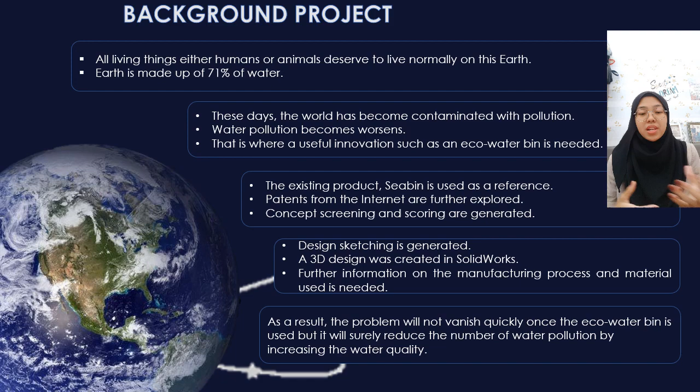We collect the trash from the sea, so we can see we can reduce the number of trash, the amount of trash or debris thrown by humans into the sea, rivers, or lakes, becomes less than before.

Background. Next, we go to the problem statement that we encountered building this innovation. First, because rubbish and debris were thrown into the water, it is so uncomfortable to see the rubbish floating on the surface of the water.

The second one is aquatic life threatened by the rubbish and debris thrown into the water. The aquatic life will be in danger because they cannot survive like we can on Earth—we cannot survive with polluted air, we cannot survive. So this is the habitat for them; they need a comfortable habitat so that they can breathe normally.

Next, the problem is also about the environment—if tourists come to our country and rubbish is mainly floating on the surface of the water, it is not an eye-pleasing environment to look at. Then, water conditions become worse, and the last problem is water pollution increasing these days.

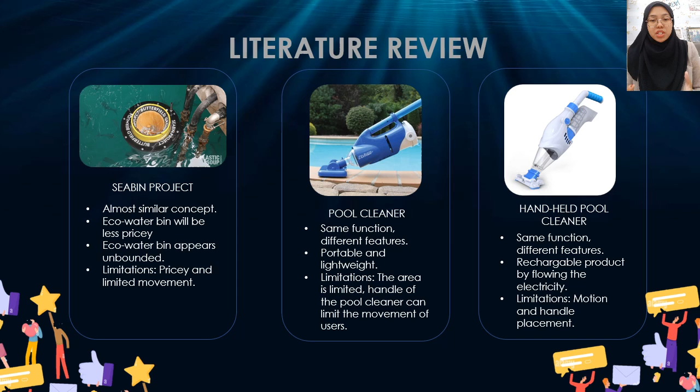So this is that limitation, but this product is rechargeable by flowing electricity into the charging port. This is one of the advantages of the product. All three products have the same function, which is to remove trash from the water, but have different features.

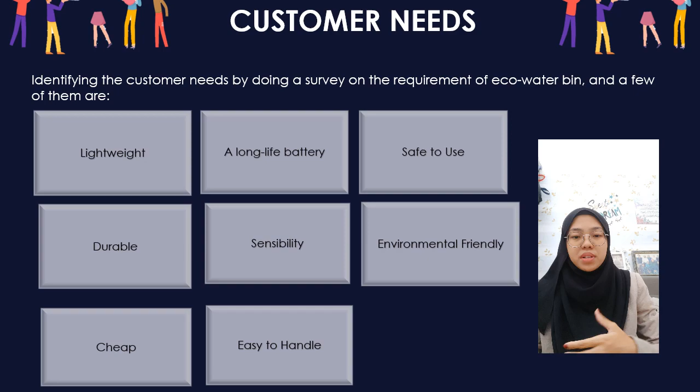For customer needs, after doing a survey for this project, we see that the customer needs are a lightweight eco water bin, durable eco water bin, a long life battery for the eco water bin, and sensibility. The eco water bin must be safe to use and easy to handle, and for sure environmentally friendly. And the eco water bin must be cheap and affordable for them to buy themselves.

Next, we go to the house of quality. From the customer requirements and customer needs we gained through the survey, we have to generate the house of quality. This is where you can relate the technical requirements to the customer requirements. The technical requirement is in the form you can see in this house of quality: water pressure, water velocity, shape, size, height of the eco water bin. That is the technical requirement. Customer requirement is what they want the eco bin to be.

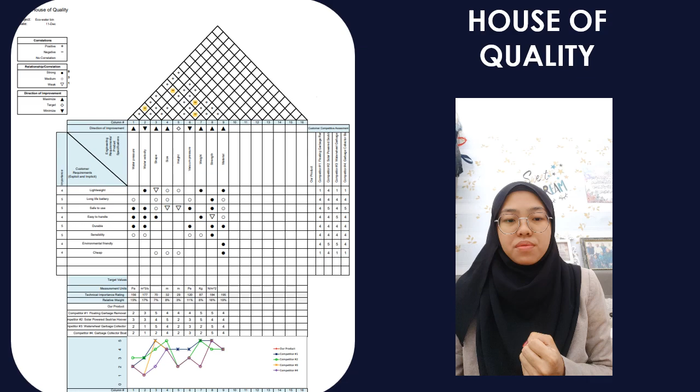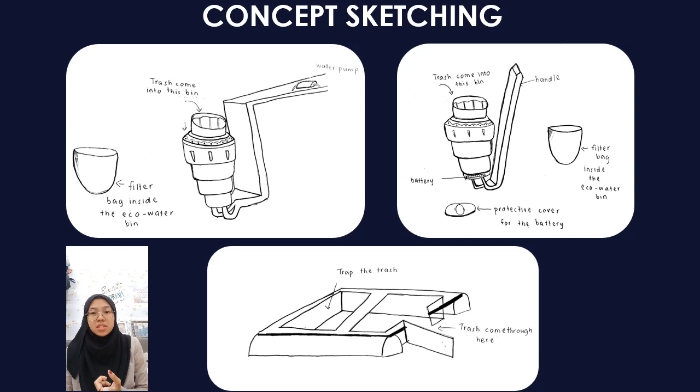For concept sketching, we generate three concept sketches from the concept scoring and screening process. We have to do concept screening first from the patents we search, then we choose three out of four patents. Then we generate concept scoring and ranking, and from there we generate the concept sketching.

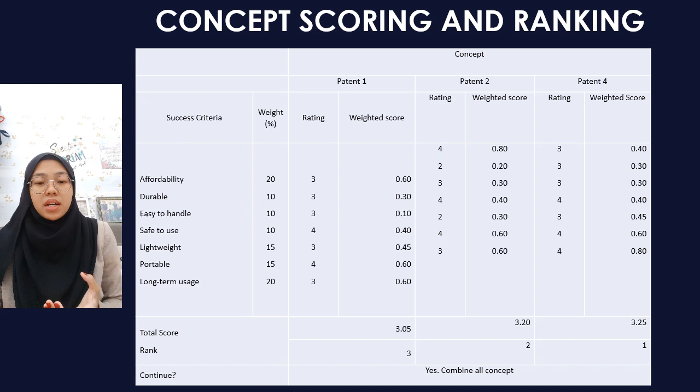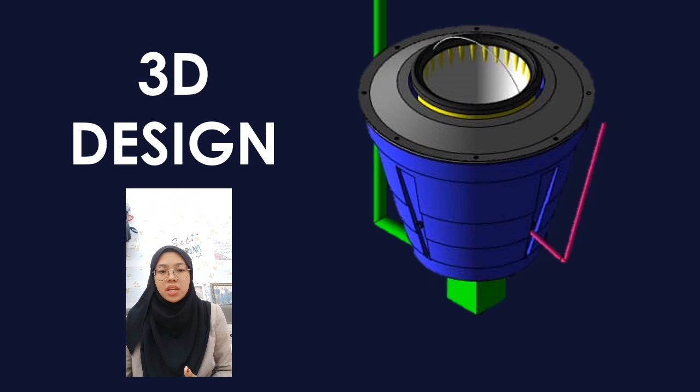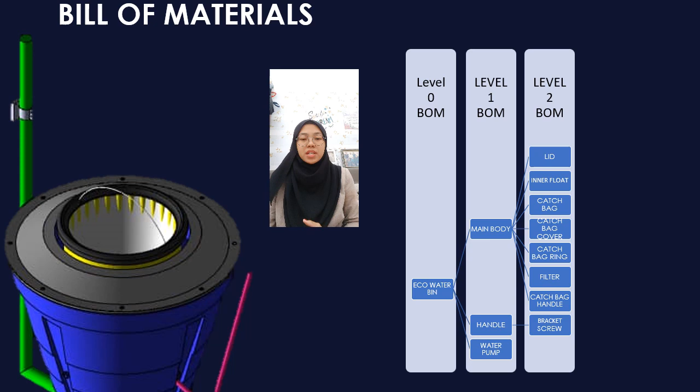We use SolidWorks to generate this design. Then for the bill of materials to finish the eco water bin product, we need a lid, inner float, lid for the main body, catch bag cover, catch bag ring, filter, and catch bag handle for the catch bag. Then for the handle, we need a bracket and screw to fit the handle. The last important one is the water pump to generate power for the eco water bin to do its work.

Next, for design for environment (DFE), for the preproduction phase we need to reduce the toxic substances used, increase the energy efficiency of processes, and increase flows of recovery and waste. So this is the preproduction phase.

The next phase is production: use materials with low impact, recyclable materials, select processes with low impact and high energy technological efficiency, and reduce the use of toxic materials. You have to reduce toxic materials, not only for the eco water bin but for every product we want to produce, to avoid any environmental impact, such as the greenhouse effect.

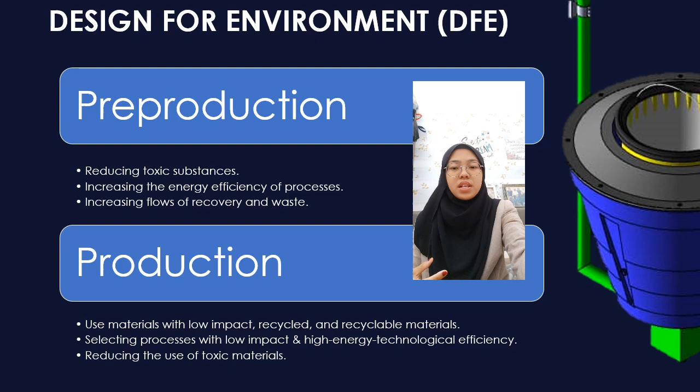Design for environment also includes use: using the product under intended conditions, reducing energy consumption and emissions during use, and planning and execution of servicing interventions. For the servicing point, you can apply maintenance and repair.

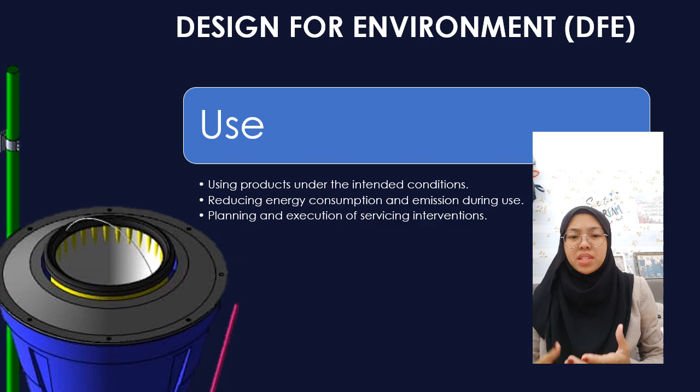So for the conclusion, we can say that the eco water bin, even though it is a small production of the product, will surely leave a big impact on the environment. The eco water bin can reduce the water pollution problem, even though it is only a small amount. That's all from me, so thank you.